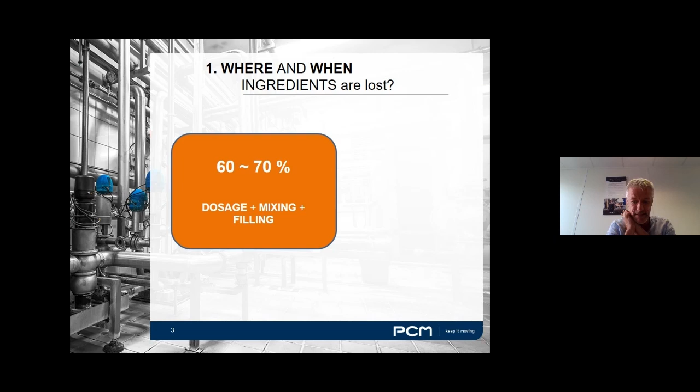Between 60 and 70%. The remaining 30 to 40% are linked to all other upstream process operations, such as the heatings, the coolings, or the various treatments you apply to your ingredients, mainly to the white mass as far as heating, cooling, and treatments are concerned. So 60 to 70% are coming from the dosage, the mixing, and the filling - the blending, basically.

And what I'm talking about here are the losses during what we call an inline process, meaning that the yogurt blending is done inline simultaneously to the filling and packaging. We don't talk here about batch process - all the figures, all the means to reduce the losses we are going to discuss are not linked to batch process. We are focusing only on the inline process of manufacturing.

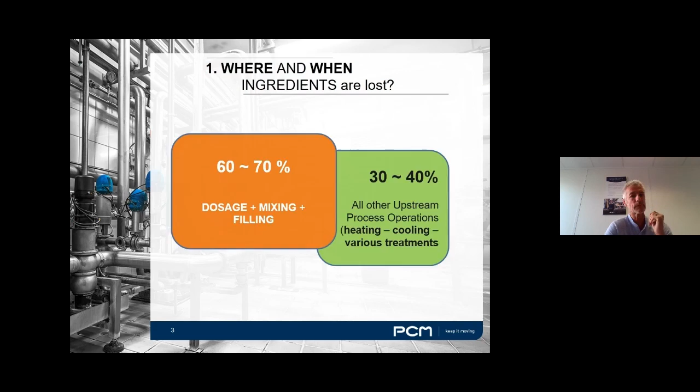So if we detail where and when we lose ingredients during the dosage, the mixing and the filling stages, it starts with the start of production. Each time you start a new production, every day or in the middle of the day, when you decide to start a new production, you will undoubtedly lose some ingredients.

During production itself, you are also losing ingredients, mainly due to dosing repeatability, or more precisely due to poor accuracy of your dosing. That's the first reason why you lose ingredients during production. The second one is linked directly to the quality of the fillings, and I will detail those issues in a minute. Start of productions and container changeovers are also a major reason why you potentially lose some ingredients.

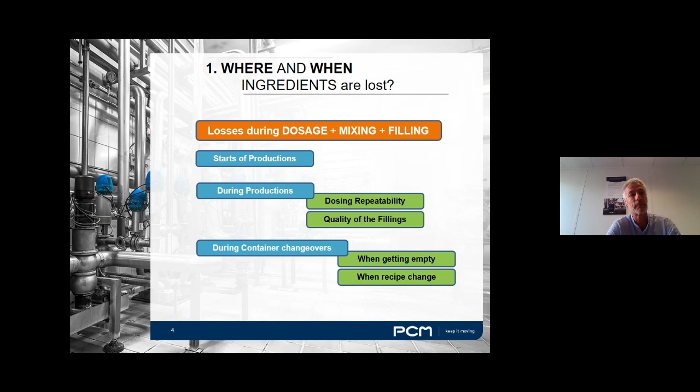When the containers are getting empty, we will see how and why you lose ingredients, but this is a major stage where you lose ingredients. Not only when the containers are getting empty, but when you decide to change the recipe. When you decide to go from one production to another with new ingredients, that's an opportunity where you're gonna lose ingredients. At the end of the productions, each time you stop a yogurt production, we will see also that you are about to lose ingredients, white mass or fruits or any additives you may have in your recipe.

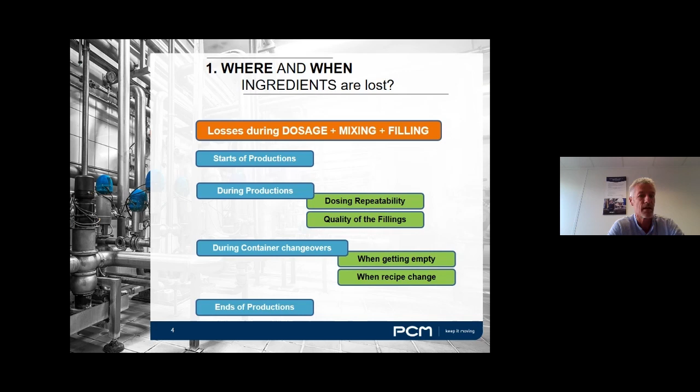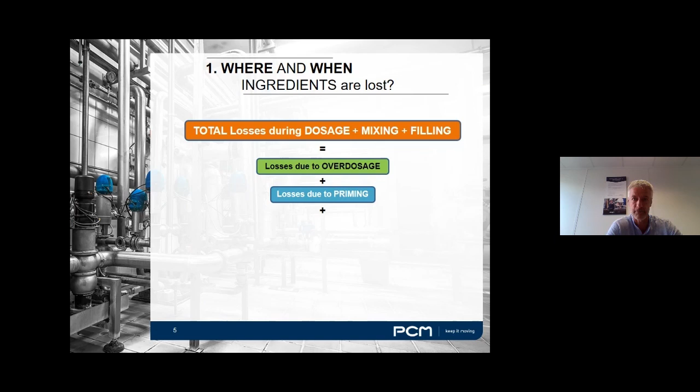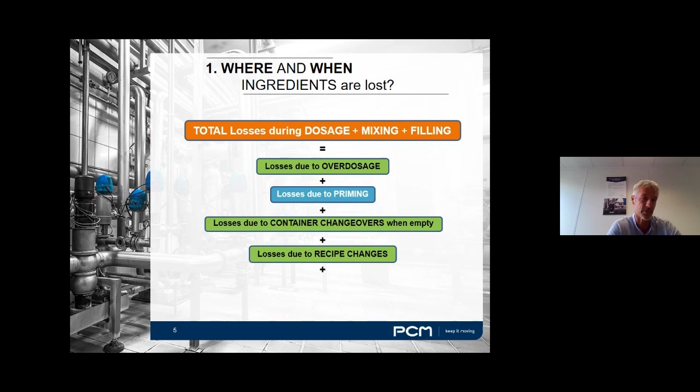Altogether, what we're talking about related to the dosage, the mixing and the filling stages, we're talking about 6 different sources of losses. First, the losses due to overdosage, which I'm going to detail in a minute. Then, in addition, we have the losses due to the priming phases when you start the production, the losses due to container changeovers when they are getting empty, the losses due to any recipe changes you may run in your production, the losses due to production ends, and the losses due to filling poor quality. Globally, poor quality of your filling may lead you to some losses.

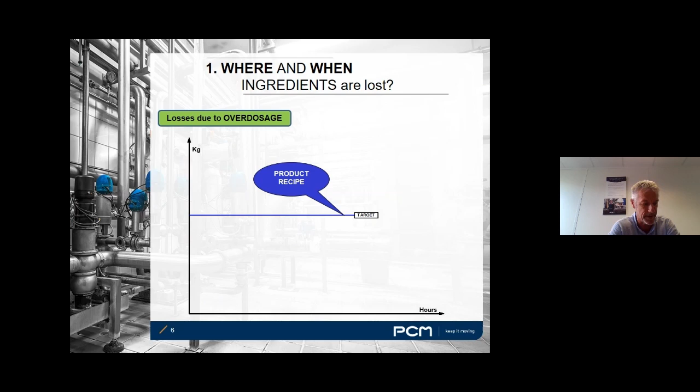Let's detail now the first reason why you lose ingredients, which is the losses due to potential overdosage. Every process where you want to dose, where you want to inject some ingredients, you always have a target, which is nothing else than the minimum of ingredients to inject. That's the minimum amount of ingredient you want to inject in your recipe. It clearly means that you are not allowed to have less than this target, but eventually you can have more. Not less, but you can eventually have more.

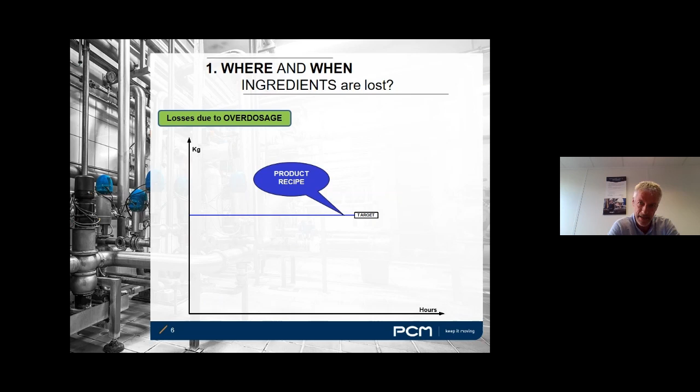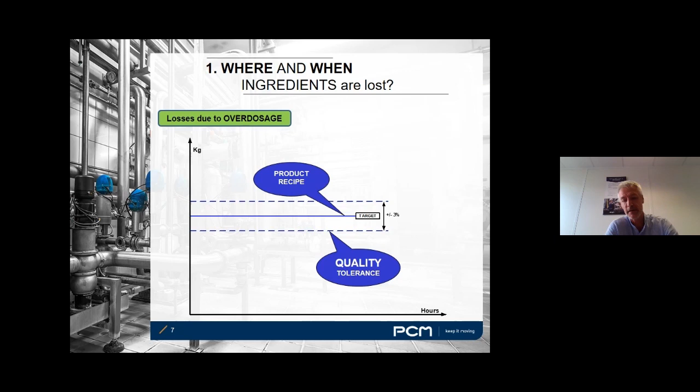Now, like every target, you've got a margin, a kind of quality tolerance, in which you will consider that your ingredient quantity will be okay. Let's assume that our margin is plus or minus 3%, and to simplify the explanation, we have equal tolerance in plus and in minus. Your injection process is made with equipment that has its own precision and that will probably fluctuate during the overall process duration.

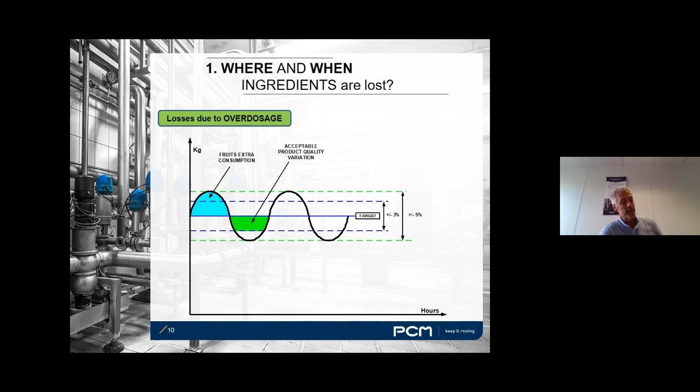Let's take the assumption here that you use a dosing equipment with plus or minus 5% accuracy, of precision. Well, with such precision and fluctuation, you will get variable quantities of ingredients above or below the target. The first category will be the still acceptable product quantity, because it's lower than the target, but higher than the minimum allowed quantity. The second category will be every quantity greater than the target.

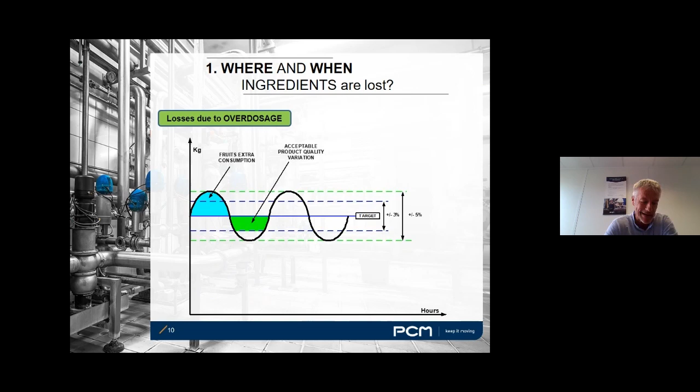We are talking here about ingredients' extra consumption. Most of the time, these ingredients, either fruits, pulps, or any other additives, being more expensive than the white mass, this extra quantity, if not directly a loss of ingredients, is already a loss of money. The third category of quantity of ingredient is below the minimum allowed quantity. This is definitively the kind of dosage you want to avoid, because if it happens, the quality department will reject all production with such quantities, resulting in pure losses.

This is why, basically, if you cannot use dosing equipment with better precision, you will need to artificially increase your target to avoid these losses due to underdosage. In our example, you will need to increase by 2% the targeted quantity of ingredients to inject. Doing so, you will be sure of never having underdosage below the minimum allowed quantity. Even if you are in the lowest part of your variations, like I'm showing here, you will never go below the acceptable quantity, never. But, there is a but.

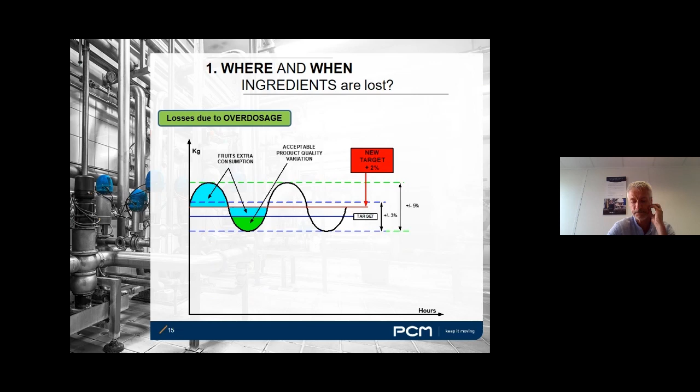At the same time, you have to realize that you will increase the quantity of ingredients compared to the original and still contractual commercial target. Well, in short, you are still losing money. We will see in a minute how to minimize this. But you have probably already understood that the key here is to use dosing equipment with the highest possible precision, to lower as much as possible the fluctuations, and therefore to better control the injected quantities. But we will see how to do that.

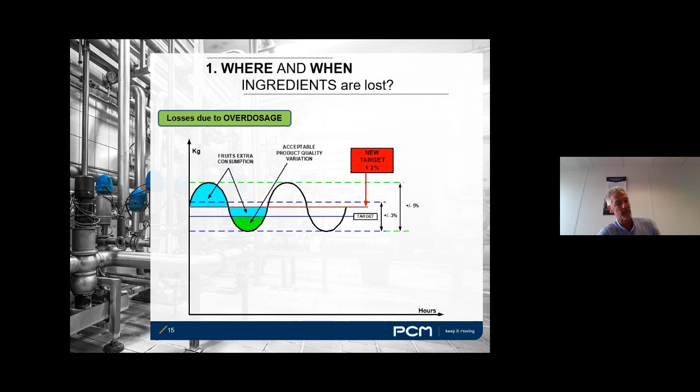The second reason why you lose ingredients is during the priming phases. Most of the time, your process requires time and the use of ingredients before getting to homogeneous mixings. You need to have equipment, including all pipes, as dry as possible when you start your production to avoid what we call the dilution fronts, to avoid them as much as possible. And to have means to obtain homogeneous mixing as soon as possible, especially in case of inline mixing, where every second of flow can see kilos of ingredients going away, if not homogeneous.

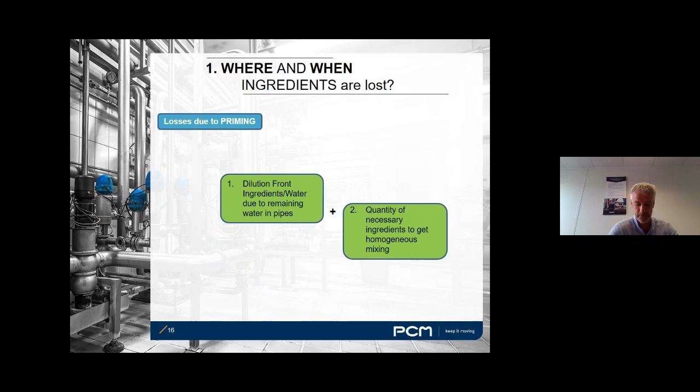What about the losses due to container changeovers when containers get empty? It's very difficult, if not impossible, to retrieve every bit of ingredients in a container, a bag, or a pouch. Product viscosity or suction phenomena may cause ingredients to stick to the edge of a container. A bag or pouch that's badly handled could collapse, with parts sticking together, isolating the ingredients from the dosing pump and causing poor dosage accuracy. Many reasons result in ingredients being kept in their containers, not poured into the yogurt, not sold, thrown away, and definitively lost.

In addition to these losses, you also have to deal with the quantity of ingredients that remain in the pipes or flexibles when you manage the changeover from an empty container to a new one. That's another source of potential losses to be considered.

When you change your recipe, meaning replacing a production with ingredient 1 with a production with ingredient 2, you face a step where losses can increase. When you stop production with ingredient 1, you probably still have it in your pipes, hopper tanks, or other locations of your installation. If you don't manage this properly—and we'll see later how—you will lose this quantity of ingredient and be forced to throw it away before starting your next production.

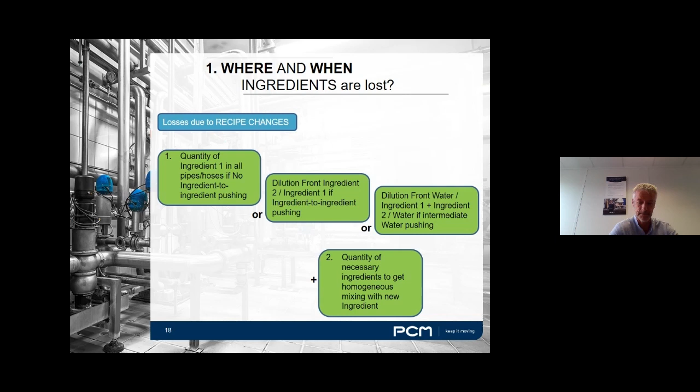When your production ends, there are also many reasons why you probably lose ingredients. Production starts and recipe changeovers are sources of losses, but production ends are also a source of losses. Again, if production ends are not managed properly, this stage is potentially a source of major losses, because products remain in your installation instead of going into your cups.

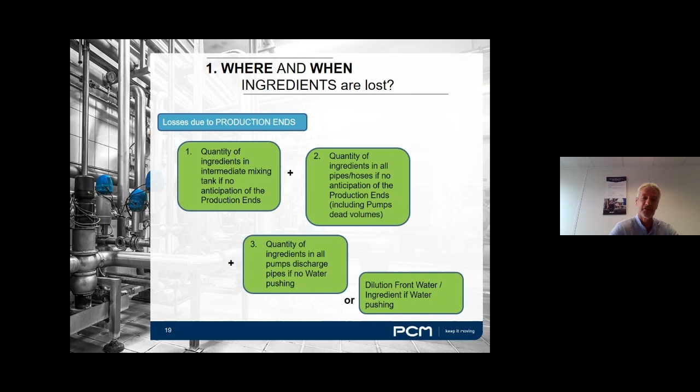I've mentioned filling poor quality as a major reason for potential ingredient losses. That's true, because dosing well, having homogeneous mixing as soon as possible, and managing all the different transition phases properly is not enough. You also need to make sure your filling process at the end is well organized, so as not to spoil all the efforts taken upstream.

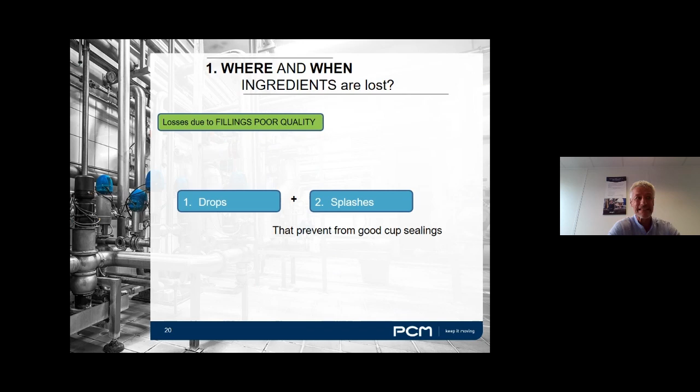What I'm talking about here are drops, potential drops, eventual drops or splashes that will prevent good cup sealings. I'm also talking about potential inaccuracy in your final filling that will make cups unacceptable from a quality standpoint.

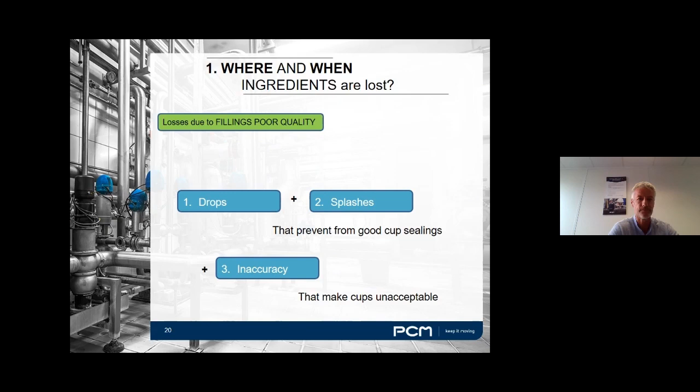Well, Thierry, we've seen that there are several reasons to lose ingredients during the manufacturing process if we don't pay attention. So before we look at ways to improve things, can you tell us exactly what we are dealing with? What quantity of ingredients are we talking about here?

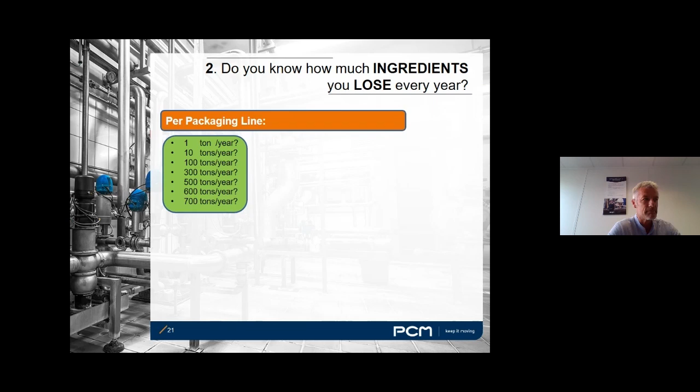Well, yes, Pierre, that's a good transition to the next section of this presentation. I told you I'd ask a basic question: do you know how much ingredients you lose every year? You can't answer, but you probably have some figures in mind. If not, what do you think? For each individual packaging line in a factory, do you think it's 1 ton per year? 10 tons a year? 100 tons? 300, 500, 600, 700 tons a year? More? What do you think the potential losses can be if you do absolutely nothing to address this issue? Well, our experience shows it can be up to 700 tons per year.

I'm talking here about losses of white mass or fruits. That's typically what you can unfortunately lose if you're running a highly productive multi-flavor packaging line—meaning, for example, 5 productions every day, each with 4 flavors per day, at a speed of 28,800 cups per hour, running 20 hours a day. For a highly productive packaging line, yes, the losses can be up to 700 tons a year.

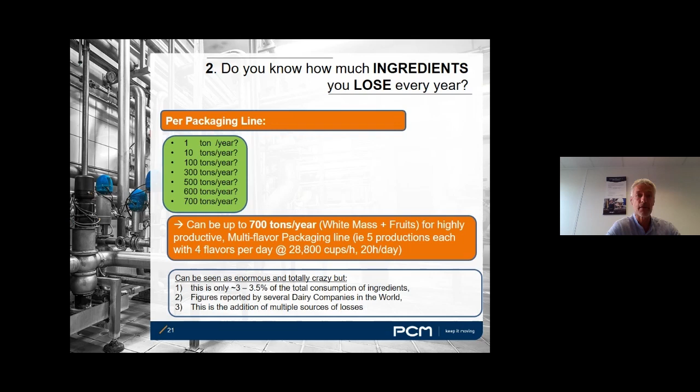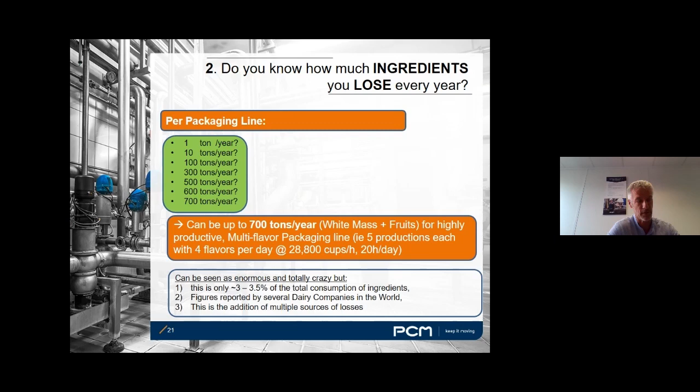It can probably be seen as enormous and totally crazy. But first, I just want to remind you that this is only between 3 to 3.5% of the total consumption of your ingredients—700 tons. These figures, or very similar figures, have been reported to us by several dairy companies around the world, so this can't be challenged. As we've briefly seen together, this is the addition of multiple sources of losses. So the 700 tons a year is the sum of all the different sources we went through a while ago.

Up to 700 tons a year for a highly productive packaging line. Well, this is probably not everybody that runs such a highly productive production. But even for smaller companies with smaller productions, the loss quantities are still potentially very high if one does not take any particular action. It can be up to 50 tons a year for small production, meaning one production with one single flavor per day at the speed of 10,800 cups per hour, just running this production 10 hours a day. So 50 tons per year for small productions.

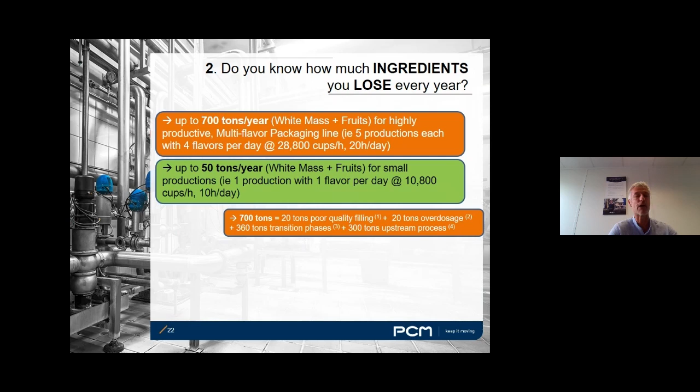If we look more in detail where those losses potentially come from, the 700 tons a year for a highly productive packaging line are split between 20 tons due to the poor quality of the filling, 20 other tons due to the potential overdosage, 360 tons related to the different transition phases - the starts, the changeovers, the ends. 360 tons can be easily lost if you don't pay attention to those transition phases. And the remaining 300 tons are linked to the upstream processes outside of the dosage, mixing and filling.

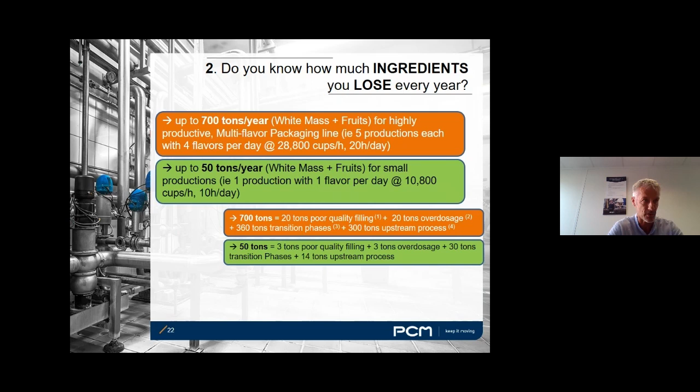For the 50 tons, it is split between 3 tons linked to the poor quality of the filling, 3 tons due to the overdosage, 30 tons to the transition phases, and the remaining 14 tons coming from the upstream process like heating and cooling. I'm not going to detail here today.

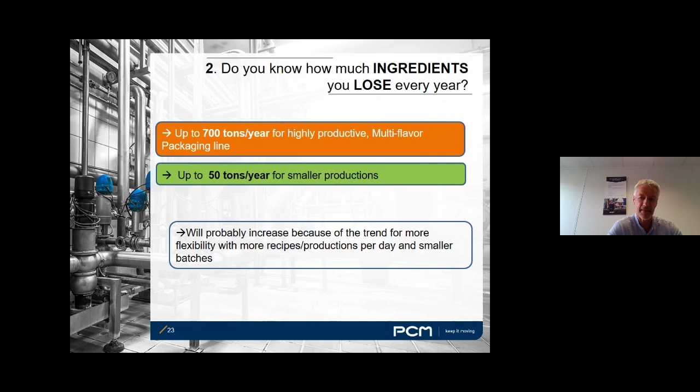Up to 700 tons a year, or up to 50 tons a year for smaller production. Well, again, it may seem enormous, but it's a reality. And I have bad news also, news that is not good - it's that it can be worse. It will probably increase, those figures will probably increase or could increase because of the trend we can see today for more flexibility, with more recipes, more productions per day and smaller batches. So those figures, if we don't take them seriously, can be even worse.

Okay Thierry, so hopefully no one is losing all these quantities of ingredients because most food industries have already started to tackle this issue. But shall we see now what can be done and what are the solutions to minimize the losses?

Yes, Pierre. Now what I propose is that we go through the means we at PCM have identified to optimize, to minimize those losses. We have identified no less than 10 different means to minimize those losses. Let's go through those 10 different means.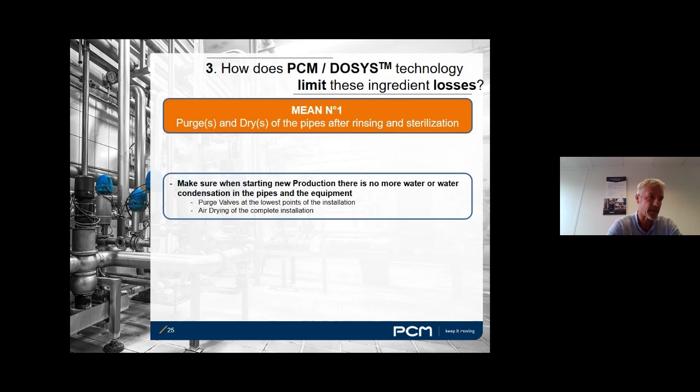Starting with mean number 1, which is nothing else than just making sure that when you start a new production, there is no more water or water condensation in your pipes or equipment. This means you'd better make sure you have purge valves at the lowest points of your installation, and that eventually you can use air drying to completely dry your installation. So mean number 1 is nothing more clever than that - just be able to purge and dry all your pipes to avoid water remaining in your installation, and to ease the homogenization of your yogurt as quickly as possible.

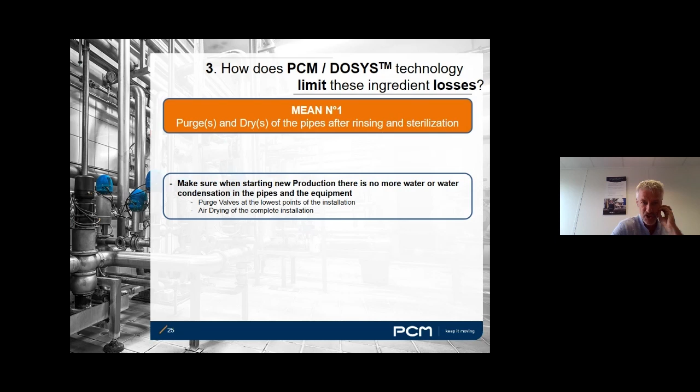Mean number 2, and here we start to talk about all the means that will improve the transition phase and that will allow us basically to anticipate and optimize the production changes and the production ends. Here we are talking about the ingredient changeover with ingredient-to-ingredient push. What does it mean? Let me show you, let me explain this in more detail.

That's a basic scheme of what could be an inline installation to produce yogurt. Here is the dosing pump you use, the fruit contained in 2 containers that can be linked to your dosing pump. You've got the white mass coming this way from a pump and through a hopper tank. Here we've got the injection point where we will inject the fruit into the white mass. The two will go to the inline mixer, and at the end it will go to the fillers to be poured into the cups.

Well, imagine you are running the production with the first container, container 1, full of fruit A. So you run the production. At the same time, while you are running with this fruit A, what you can do with our equipment is use another flavor contained in another container, and prime this container, basically have it ready as soon as possible. It simply means that you will prime this flexible pipe, you will make sure it's full of fruit to speed up the changeover process. This can be done at the same time as the production while you're producing with fruit A, without stopping the production.

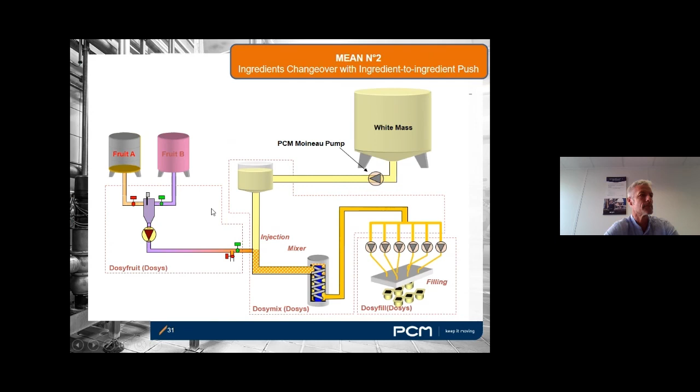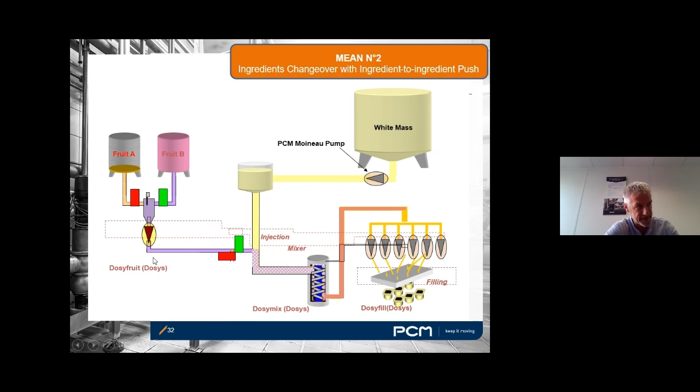Obviously, when you do a fruit-to-fruit push, you've got what we call a dilution front, which is a mix of the two fruits you have to get rid of. This is why you need a specific valve system to get rid of this dilution front, so it's not poured into the yogurts or into the cups.

Let me show you how it looks on a 3D animation, that's a typical PCM fruit station. So while you are producing, you can prime with the second fruit, fruit 2, from the container to the dosing pump, while you are producing with the first fruit shown in red here. So you never stop the production.

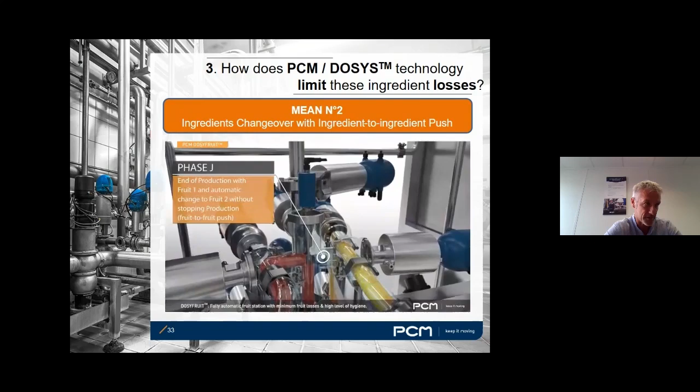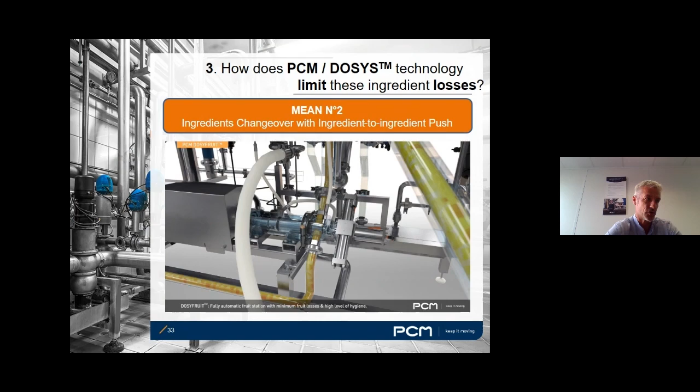When you decide to change from fruit 1 to fruit 2, you just change the valves, and you have here what we call the dilution front. But you can still retrieve a large amount of fruit 1 by pushing it with fruit 2, allowing you not to throw it away. So that's ingredient to ingredient push.

For some configurations, not all of them, but for some specific configurations, sometimes it's better to run what we call water to fruit push. Instead of fruit to fruit push, you can run water to fruit push, which can allow lower ingredient losses in some situations.

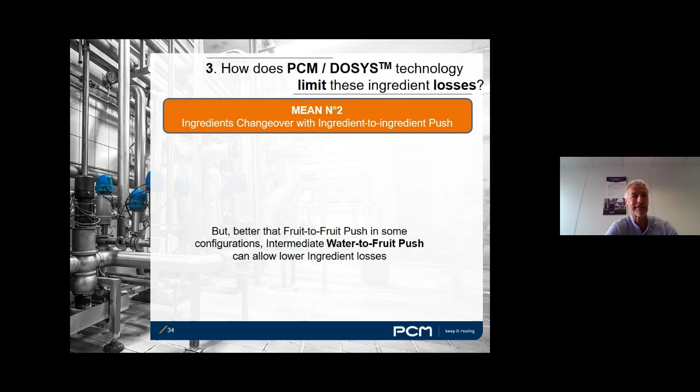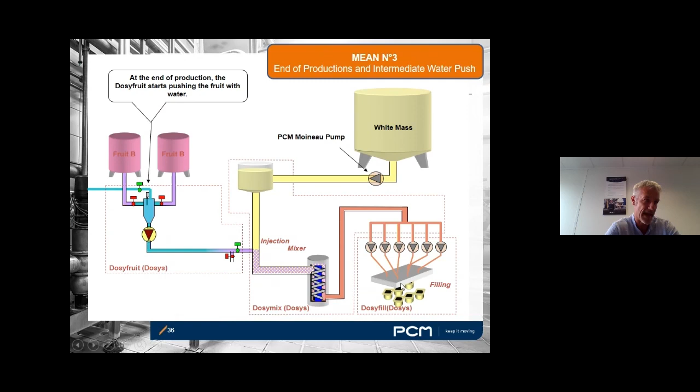So we are talking here about mean number 3, which is intermediate water push. Again, using the same scheme, instead of pushing with a second fruit, we have the possibility to push with water that will come from the pump inlet. Doing that, using the water, you push the fruit still contained in the pipes downstream of the pump until the filler heads. So it's water to fruit push.

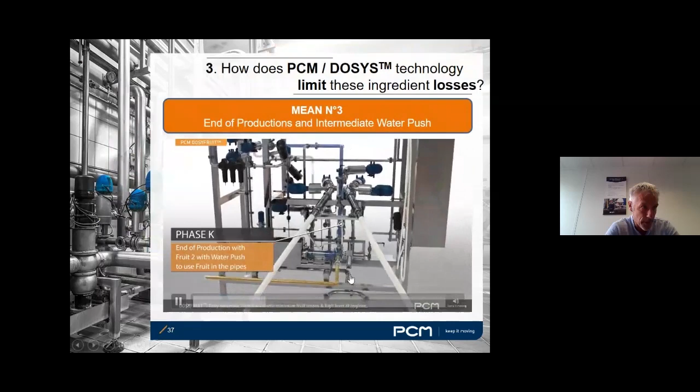In this 3D animation, you can see the water coming down to your pump here. You use this water to push the fruit still contained in the pipes, allowing you to use all this amount of fruit contained in the pipes to finish the production.

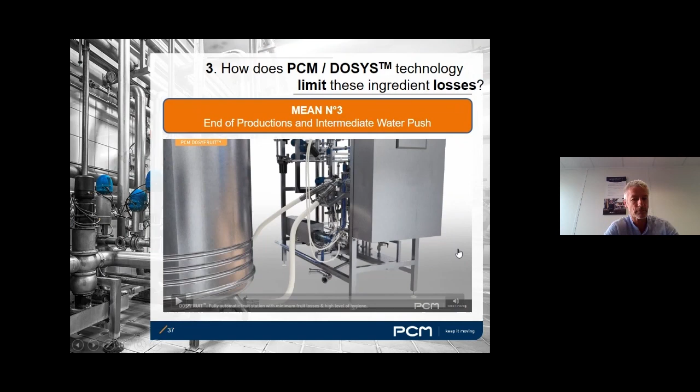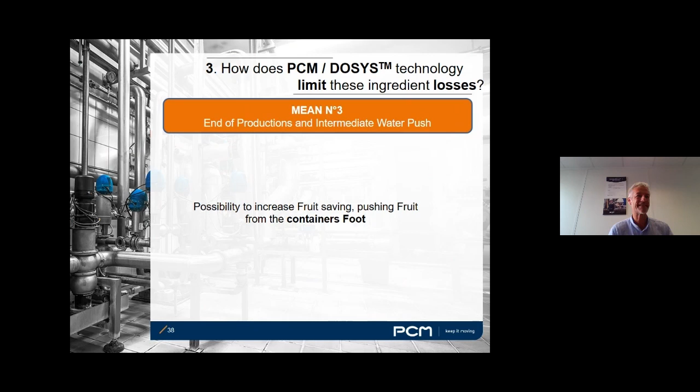There is also another possibility, even smarter than what we've just seen: the possibility to push those remaining fruits directly from the container foot. Let me show you again using the same scheme. You see, this is just this possibility.

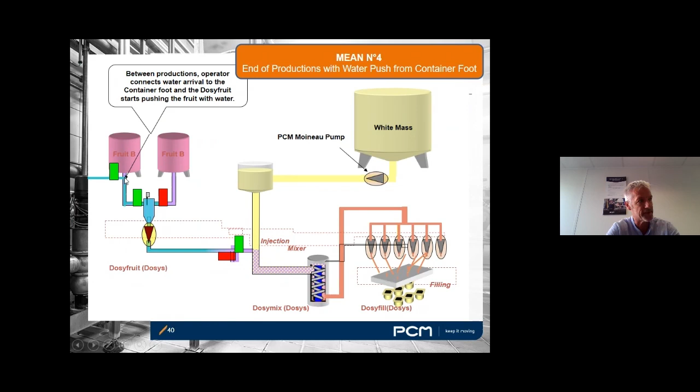Instead of sending the water to the dosing pump, you send the water directly to the container foot. This allows you to retrieve all the fruits contained in those flexible hoses between the container and the dosing pump. So it's an extra saving that can be made possible.

Mean number five is the possibility to rinse and sterilize your installation, just focusing on the container foot only. Let me show you. That's a basic P&ID of a standard fruit dosing station, where you've got the dosing pump here and the container on top.

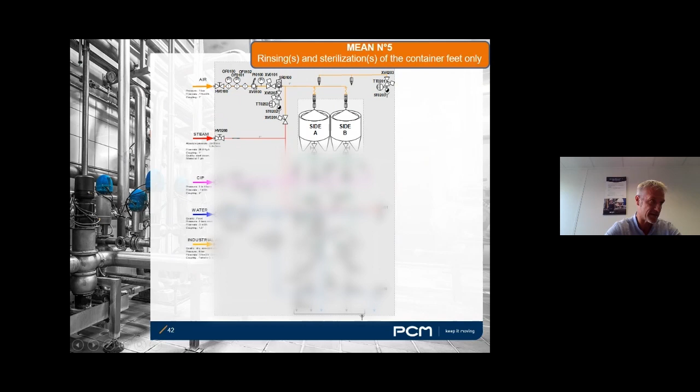In between, you have several possibilities to allow access of steam, CIP, water, and so on. If we zoom into this container foot area, what I'm talking about here are those specific connectors that will allow the water arrival between the container foot and the beginning of the flexible hoses.

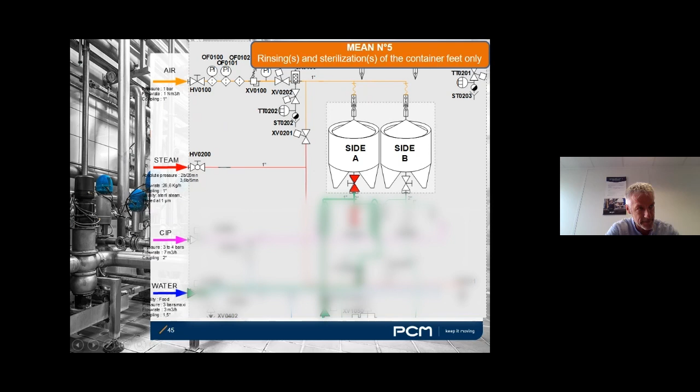It means that the water will go this way, and you will rinse only the small portion of the flexible hose, meaning that you can isolate the section where you still have some fruit. You will close this manual valve, keeping the fruit inside the flexible hoses.

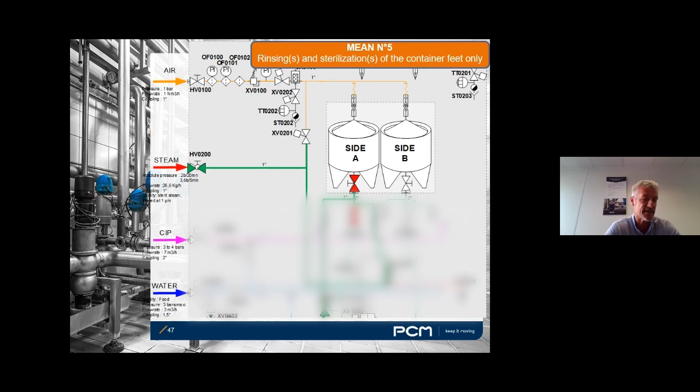When you replace the container with a full one, you will then be able to run a steam sterilization of this small portion only, between the container foot and the flexible hose, which is the only part that's been in contact with air, and the only part that requires steam sterilization. Doing that, you can retrieve all the quantity of fruit still kept in the flexible hoses without losing them.

Thank you, Thierry. So all these methods aim at finding ways to limit losses during the various transition phases of a yogurt production, right? So if I got it right, the tricky transition phases are the start, the change of containers or ingredients, and the end of production. And we know that they can vary depending on the complexity of your organization. Could you now tell us more about quantities?

If we take into consideration only those 5 first means, if you do nothing special regarding transition phases, change of fruits, change of container, then for a highly productive production, you take the risk of losing not less than 85 tons of ingredients every year, production after production, start after start, container changeover after changeover, recipe change after recipe change.

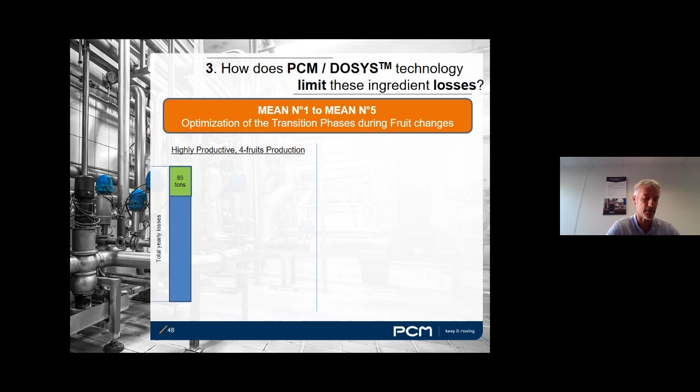If you don't use one of the 5 means we just went through together, you will probably lose not less than 85 tons. On the other hand, if you apply all of those 5 means, you will reduce those losses by between 7.5 and 13 tons a year, meaning a gain of 15% of fruits every year. That's for the highly productive productions. The figures are probably less impressive for smaller production.

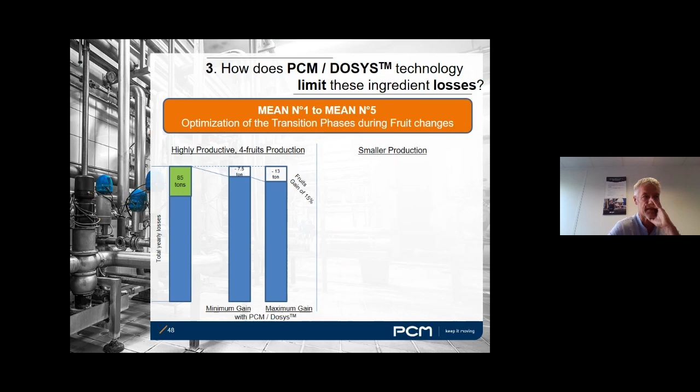12 tons, if you do nothing, are probably the loss you will suffer from. That can be reduced to 2 to 3.5 tons a year, a gain of 30% of fruits, if you implement the 5 first means we just saw together.

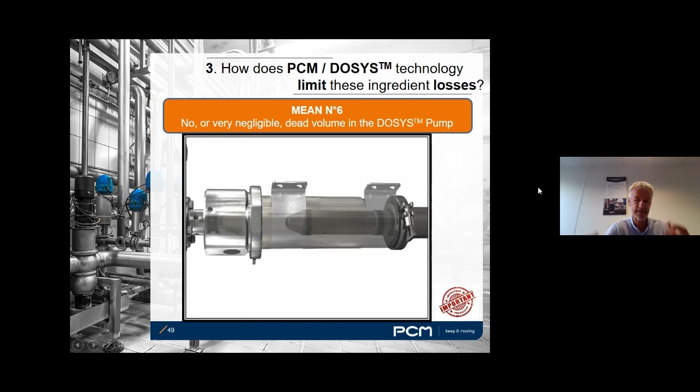Mean number 6: the benefits of using a dosing pump with no dead volume. What does it mean for a pump to have no dead volume? It means, like the pump we are using to dose fruits, that when it stops there is no ingredient kept in its body. Each time you stop, at the end of the production for example, you are sure you will not have product or fruits kept in the body. This is what no dead volume is about.

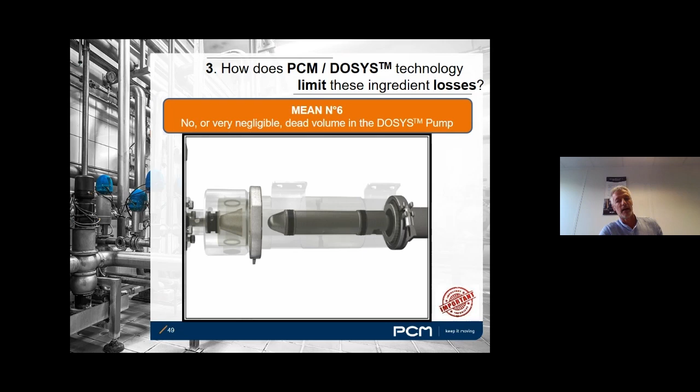Now, what does it bring in terms of minimization of losses? If you use a dosing pump with a body of 1 liter, only 1 liter of body for a standard volumetric pump, then altogether, primings after primings, ends of production after ends of production, this is not less than 17 tons of fruits you will lose every year for a highly productive packaging line.

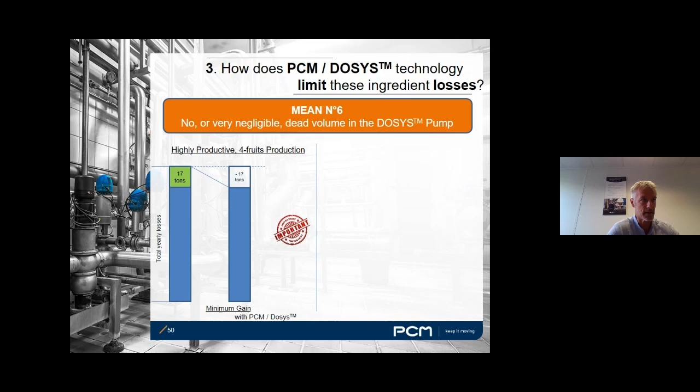With a dosing pump like the PCM dosing pump, with no dead volume, you will reduce those losses to 0. No losses due to product remaining in the pump when you stop your production. So it's very interesting. Instead of 17 tons, you will lose only 1 ton if you run small production, single production a day. But again, you will retrieve absolutely 100% of those potential losses if you use a zero dead volume pump like the DOSYS pump.

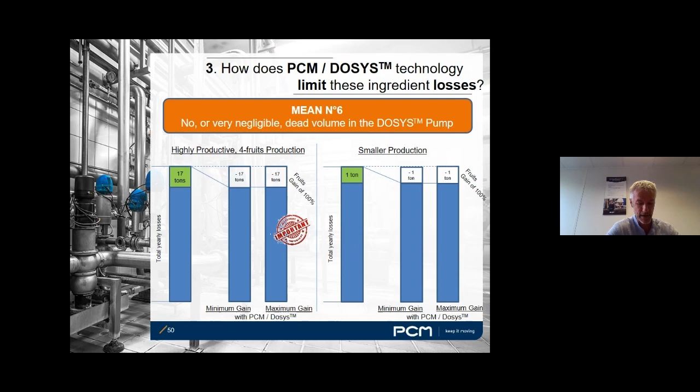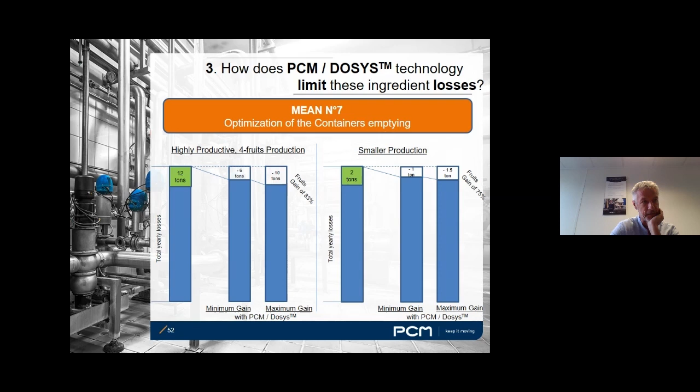In terms of values, we're talking about nothing less than 12 tons if you do nothing special regarding optimization, the detection of air bubbles, or the optimization of your bags handling. You can potentially lose 12 tons, but you can reduce that to 6 to 10 tons if you apply the means we just went through. For smaller production, only 2 tons are the potential losses, which can be reduced to 1 to 1.5 tons a year if you use the appropriate equipment.

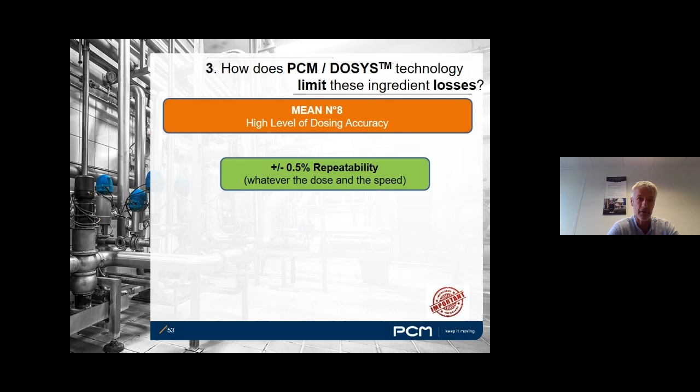Mean number 8 is to be able to use high-level, high-accuracy dosing equipment. Our dosing equipment has an accuracy of plus or minus 0.5%. That's what we call the repeatability, 0.5%, and this figure holds true whatever the dose and whatever the flow rate of your production. It's always plus or minus 0.5% repeatability.

With better repeatability, we can now lower our target, resulting in less ingredient consumption but still within the range of acceptable quality. You can even lower this target to a level where you will always stay below the original target and never go below the lower acceptable limit.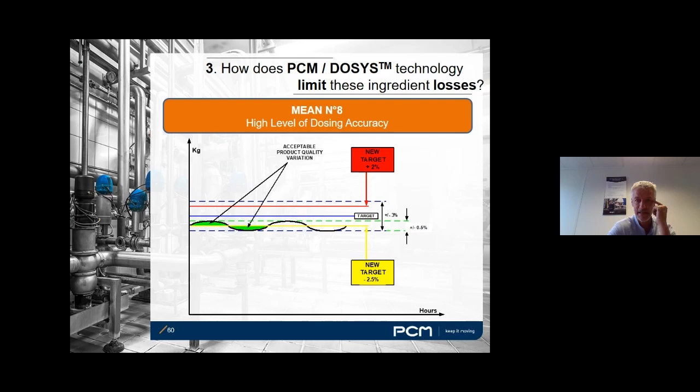If you do so, thanks to the high level of repeatability of the dosing equipment, you no longer have yogurt with too much ingredient in it, and no yogurt with not enough ingredient. Basically, that's a kind of jackpot, and here potentially the gains are quite incredible.

If you use a poor quality equipment in terms of accuracy, let's take the example of an equipment with 1% accuracy, which is not too bad but not that good either, I'm sorry to let you know that you take the risk of losing as much as 18 tons a year because of this 1% repeatability.

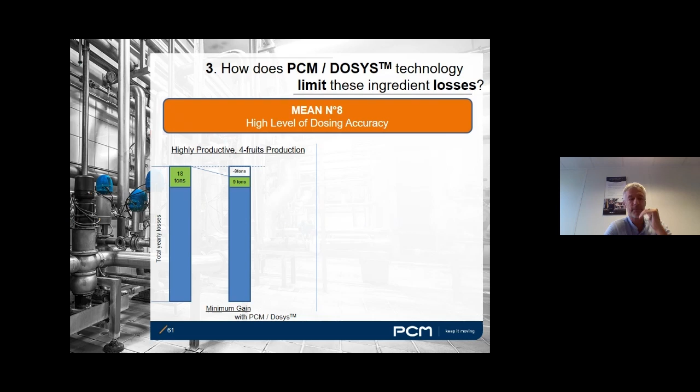If you use 0.5% repeatability equipment, it can be reduced by 2 or completely retrieved if you take the risk of lowering the target to its maximum. 18 tons for a highly productive production, 3.5 tons that can be retrieved just by using highly accurate dosing equipment. Mean number 9 is what we call the just-in-time dosing and injection.

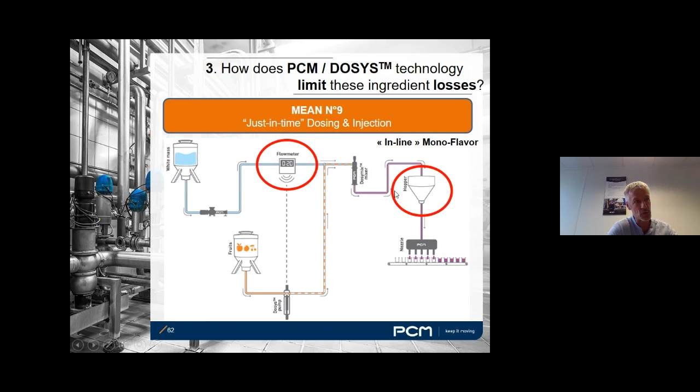So we need a flow meter, and you also need a balance tank, a hopper tank, after the mixing, after the mixers, to fill it for the filling unit, for the filling station to use for filling. That's the classical inline process. In case of multi-flavors, if you use 2 different flavors, you have to multiply the number of flow meters and the number of hoppers, potentially full of yogurt before filling.

Now, with the PCM technology, you can set up a process we call just-in-time, in which you no longer have flow meters to manage proportionality, and no buffer tanks full of mixed yogurt. This is the just-in-time mode, where the dosing of the ingredients is synchronized to the speed of the filling machine, and no longer to the flow of the white mass.

One stroke of filling gives one given quantity of ingredients managed by the Dosys pump. So no more hopper tank full of yogurt, no more flow meters to control, to buy, to maintain, to clean, and to worry about. No more.

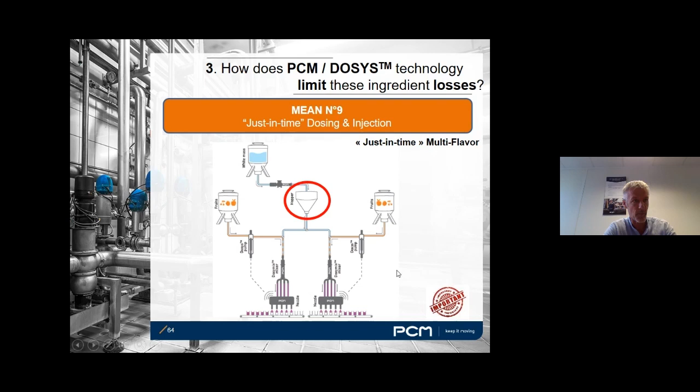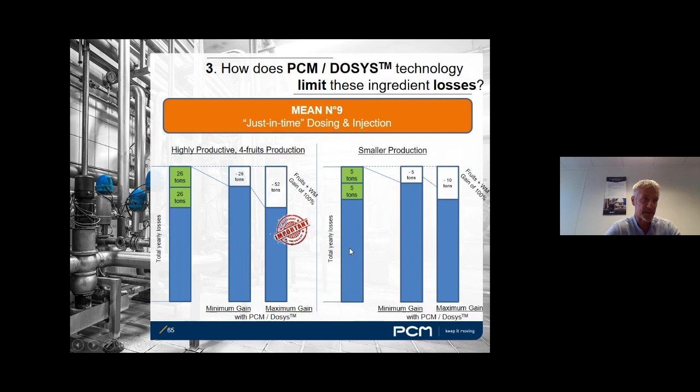With that, and it's also a very impressive result, you can reduce drastically, you can save between 26 to 52 tons a year, depending on your configuration, basically depending on the size of the intermediate hopper tank you have in the inline process, which you no longer have in just-in-time mode. So you can reduce those potential losses by 26 to 52 tons a year. For smaller production, we're talking about a gain of 10 tons a year, which is very interesting.

The last mean is related to the mixing itself, to the inline mixing. We strongly recommend you make sure that the piping of the inline dynamic mixer is optimized. It means all pipes between the mixer outlet and the fillers should be as short as possible, with equal length and equal pressure drops. That's very basic advice, but we strongly recommend you follow it.

We also strongly recommend having the fruit injection point as close as possible to the mixer inlet. Make sure you start filling the inline dynamic mixer only when it is rinsed and drained, with no water left in it, to speed up the homogenization.

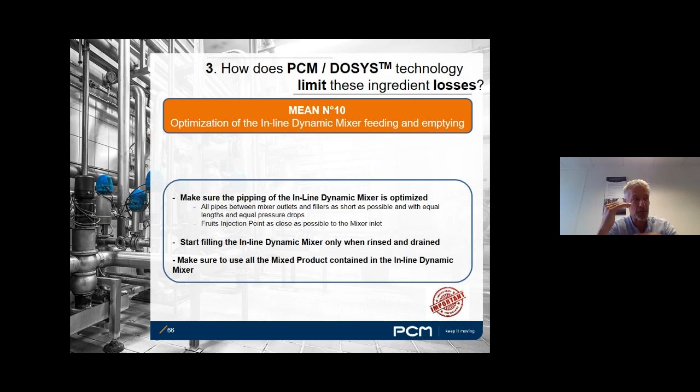Make sure to use all the mixed product contained in the inline dynamic mixer at the time you decide to stop production. Find a way to use all the fruit and all the yogurt contained in the dynamic mixer.

To do that, we can provide you with the proper equipment, the dynamic mixer, with specific equipment to manage the mixer filling, the emptying, and the mixing homogenization. We can also help you design the mixer outlets between the mixer and the fillers.

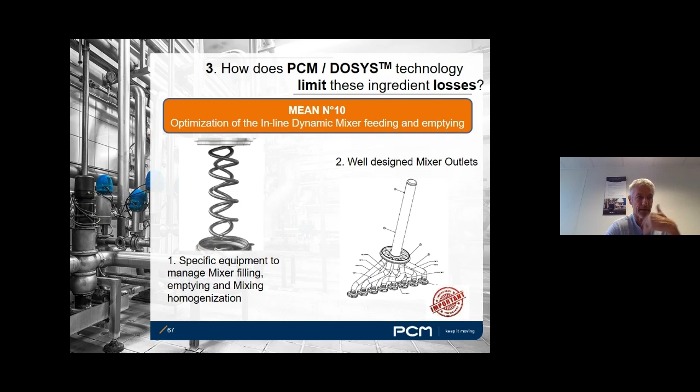That's basically the kind of equipment we can provide, along with the necessary sensors to control when the mixer is empty or full, so you can take full benefit of this management.

It looks very basic, but this is probably where the most amazing gains can be expected.

If you do nothing, if you don't manage this mixing properly, you will lose a bunch of ingredients. 225 tons a year is probably the amount of ingredients you will lose if you don't do anything special regarding the management of the dynamic mixer.

It can be reduced by 185 tons a year if you do it properly with the right equipment and processes. For smaller production, you take the risk of losing 12 tons a year if you don't do anything in particular.

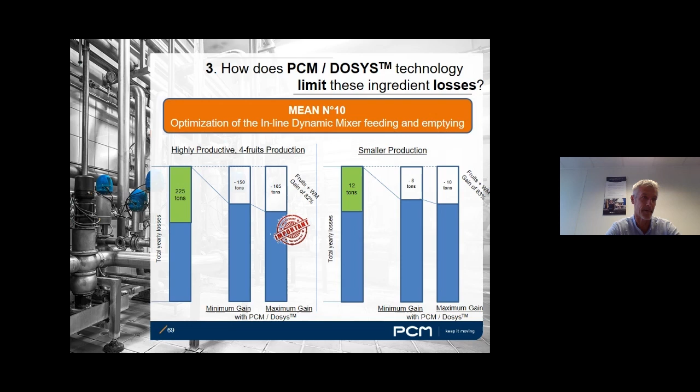This is very interesting, Thierry. So shall I summarize here?

We've said that optimizing the mixing stage, and more precisely the different transition phases, seems to be a very important stage to save ingredients. Major gains can be expected from this step.

Running in just-in-time mode, synchronizing your dosing units to your filling station, is also a very efficient way to minimize losses. And we shall not forget to deploy metering equipment with the highest possible precision.

I think it's time now to wrap up this presentation, but could you summarize for us what gains we can finally expect from all this advice?

Yes, Pierre, it's time to wrap up. Very quickly, I just want to summarize the quantity of ingredients, both white mass and fruits, that you can save if you manage properly all the phases and processes we have seen together.

Let's start with highly productive four-fruit production. Remember, I told you that if you do nothing, you take the risk of losing not less than 700 tons a year. Those 700 tons were split between 568 tons of white mass and 132 tons of fruits. So that's the split if you do nothing.

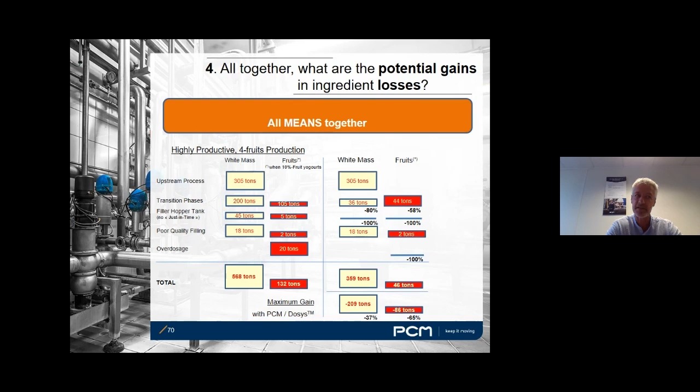46 tons of losses instead of 132 tons of losses. So it's a major gain just by using the right equipment and the right processes.

For smaller single-fruit production, I told you that you may lose 50 tons a year, 37 tons of white mass plus 13 tons of fruits, if you do nothing special.

If you apply all the means and expertise we have just seen, it can be reduced by almost 50% for the white mass and almost 90% for the fruit losses.

So you can have only a small fraction left. You can expect to have as low as 1.5 tons of losses as far as fruits are concerned, if you manage them properly.

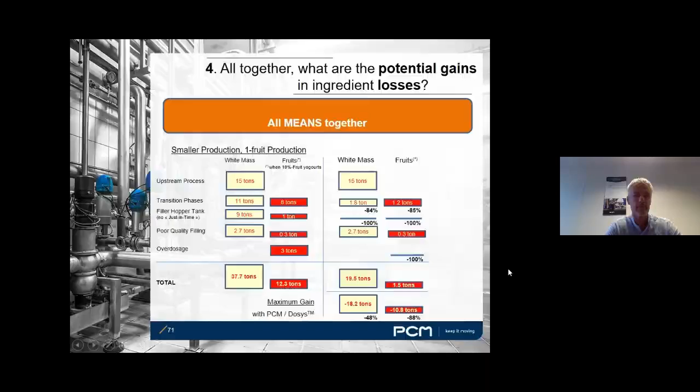What impressive numbers. Thank you very much, Thierry, for all these inputs.